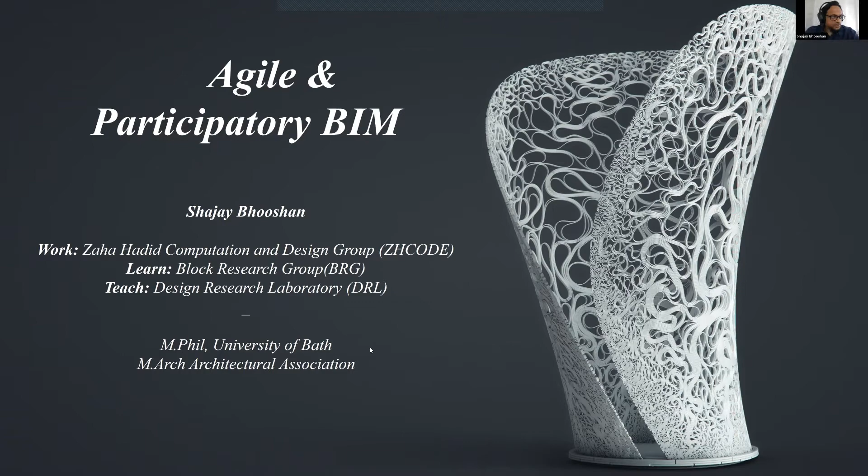So introducing a bit of myself, I currently work at Zaha Hadid Architects as the head of Zaha Hadid Computation and Design Group. I'm doing my PhD at the Block Research Group in ETH in Zurich. I also teach at the Design Research Lab, which is a master's degree program at the Architectural Association in London. And I've previously studied at the University of Bath and also at the Architectural Association, and prior to that in India.

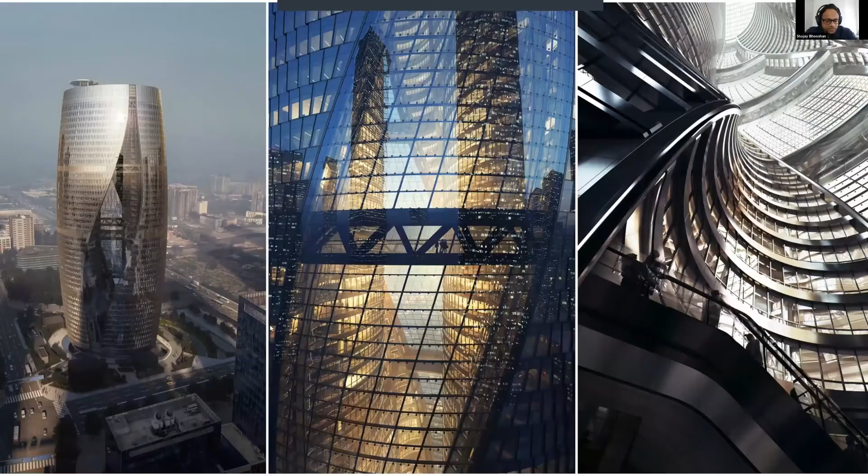So when it comes to complex geometry and complex buildings and the use of technology, Zaha Hadid Architects are kind of known for these kind of buildings, particularly this one that was completed last year, along with this one, which was also completed at the same time, towards the end of 2019. And so we have a track record and also high levels of comfort with the kind of BIM that is needed to design and deliver these kind of projects, because we've been doing that with increasing frequency since Zaha's passing 4 years ago. And also things have been in development for at least 20 years prior to that.

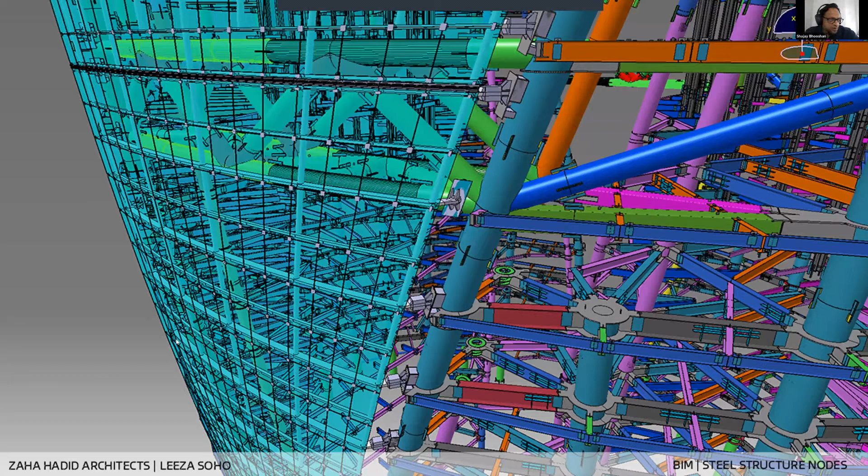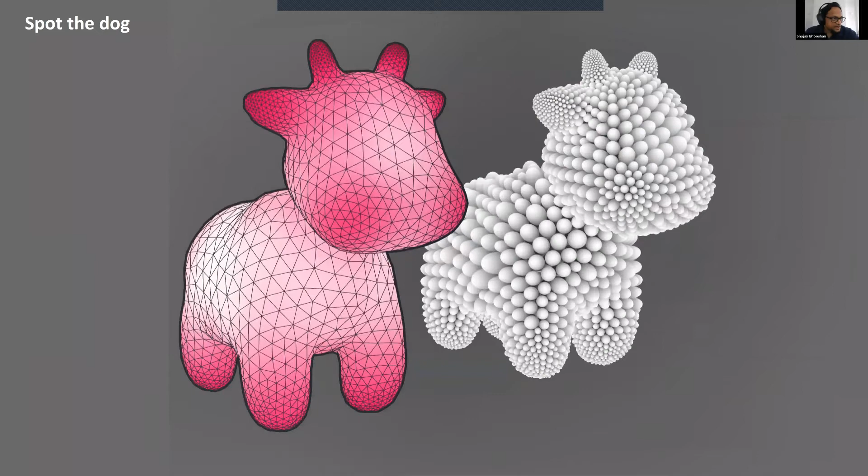So we are very comfortable with these kinds of workflows and tool chains and delivering complex geometry in a time and budget efficient way. But building on that, today I would like to talk about how we are adding in the layers of research and making BIM fun and also relevant to contemporary technological advances in other fields, particularly computer graphics and cloud computing and so on.

So that's one ingredient that we want to add to our capacities, and at the same time we want to leverage these increased capacities to start addressing other pertinent issues of the built environment, things like housing, sustainability, and so on. So in a technical sense, adding the research component, frameworks like COMPAS from the Block Research Group in ETH, which is a research-based framework, onto the BIM frameworks developed by companies like Buro Happold and Autodesk and so on.

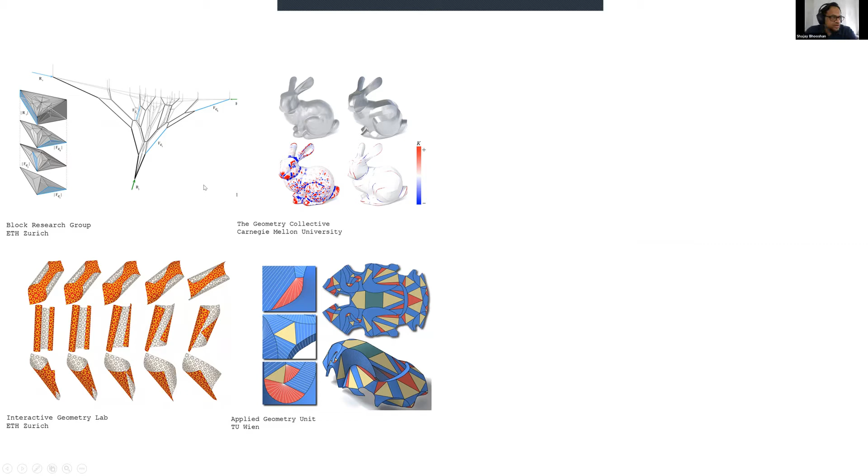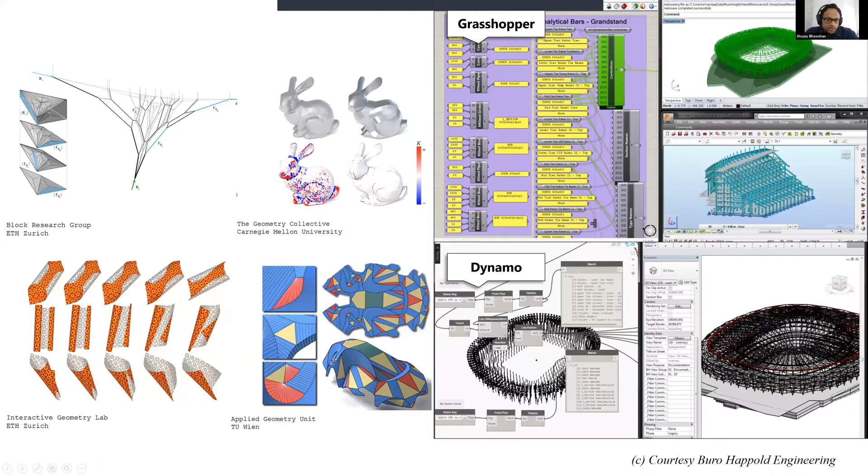Visually, this is what it means: looking at emerging research in efficient structural design, processing of geometry, interesting topics of origami and how that might affect manufacturing and so on. Combine that with everyday, business as usual BIM, which most of you would be aware of. And again, this is not anything particularly new. Even in the pre-computer era in the 19th century, architects like Gaudi were able to focus on the expressive aspects of spatial design, like here on the left, building upon lots of knowledge of other people and established protocols of design using geometric methods like these on the right.

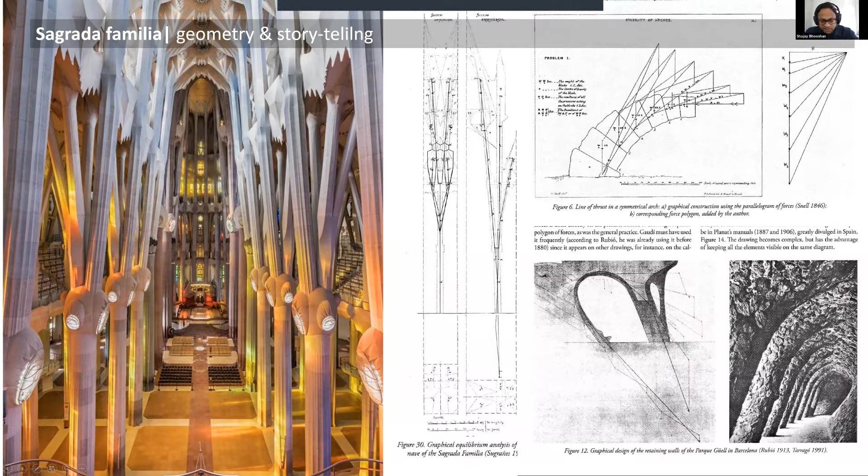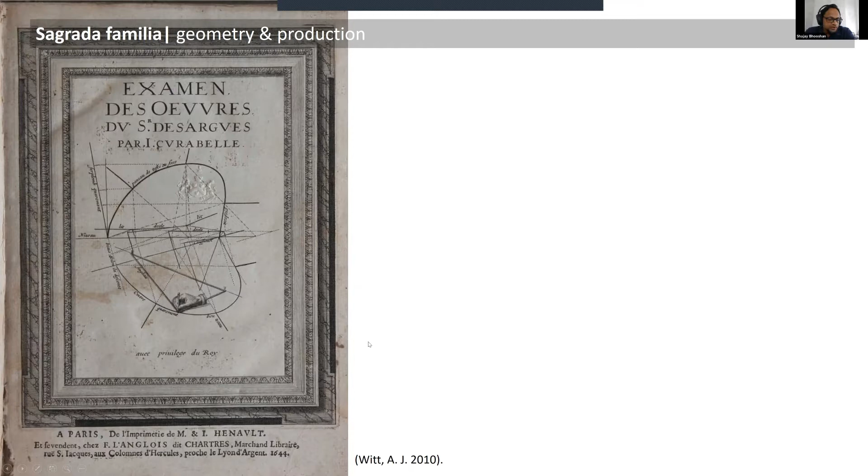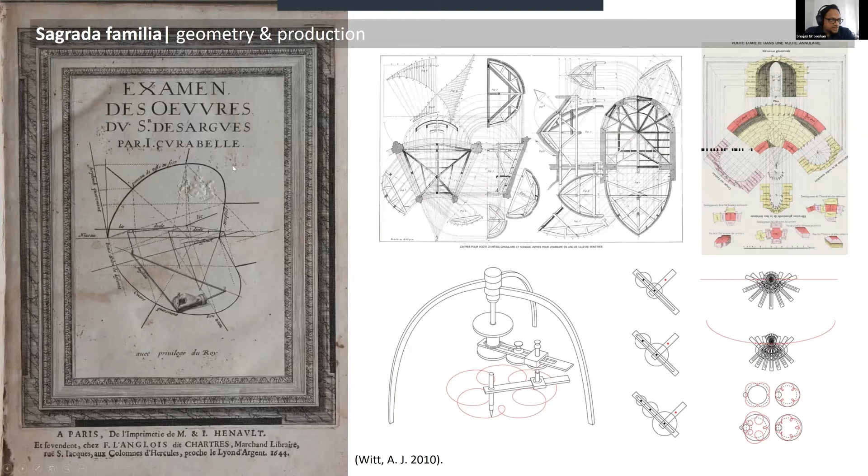And further, even construction economies were already building on such knowledge, which was encoded into manuals, into documents, and also into ways of drawing construction drawings and instruments to draw the geometries without knowing the mathematics behind it. So there was an entire ecosystem of such built up geometry based knowledge, which is what we are engaging with. And this is also very true in other fields which are making rapid progress, like computer graphics and digital movie making, where there are several PhDs worth of technical research operating in the background of the actual storytelling, the lighting design, and so on.

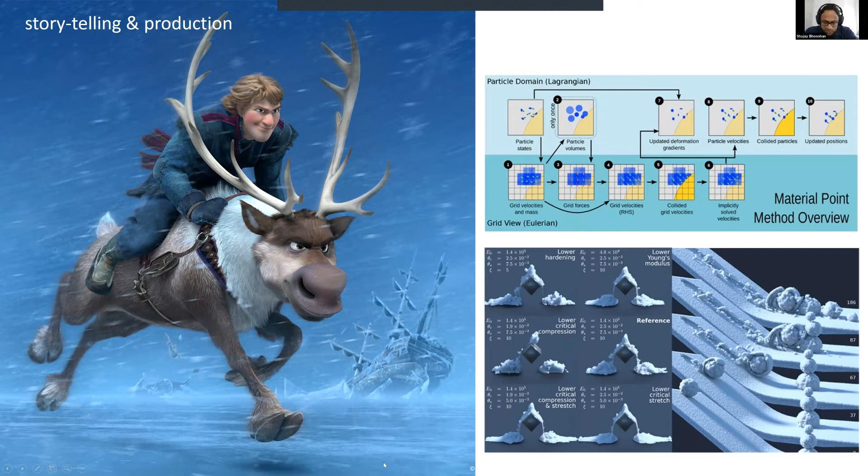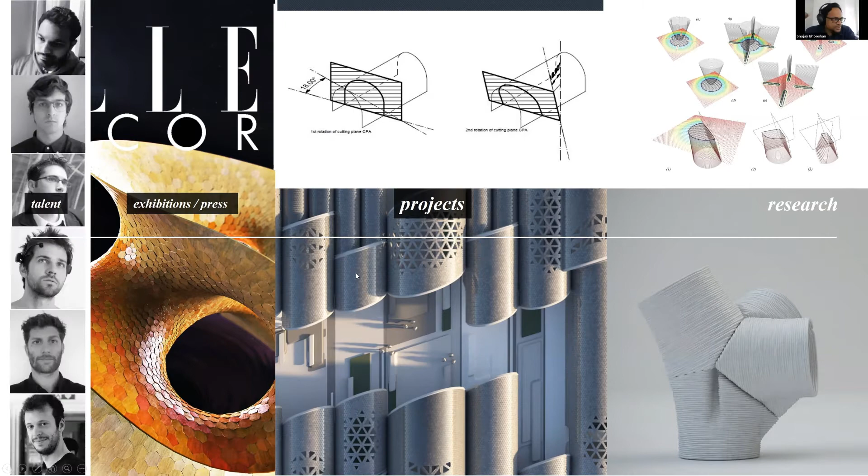So two main ingredients to this, that we are borrowing from history and also from other disciplines, is first of all how do you construct an agile team. My team is about 11 people, and Zaha Hadid Architects is about 450 people. So the 11 of us do a range of things, including project independent research and project-based applications of that research. We also do a lot of exhibition and press related work, and also talent development and acquisition and network development. So just focusing a little bit on how to build talent and networks.

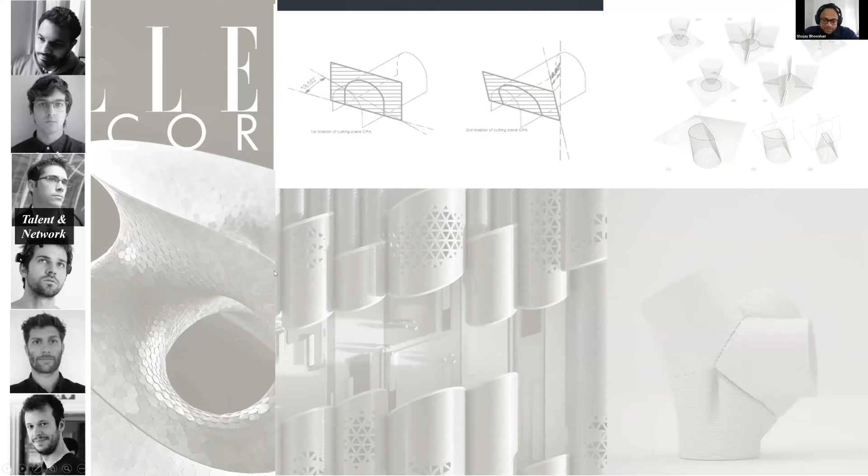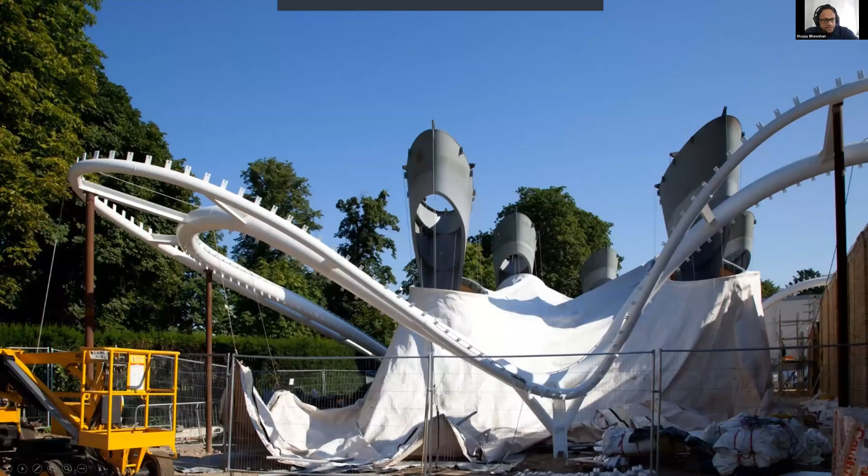And so when we, alongside like in London, where there was like real buildings being made in a similar way, where you bend pipe and you stretch fabric. In this case, it just happens to have insulation, and it also happens to be double layered and so on. It's better engineered, better made, but the principles are the same.

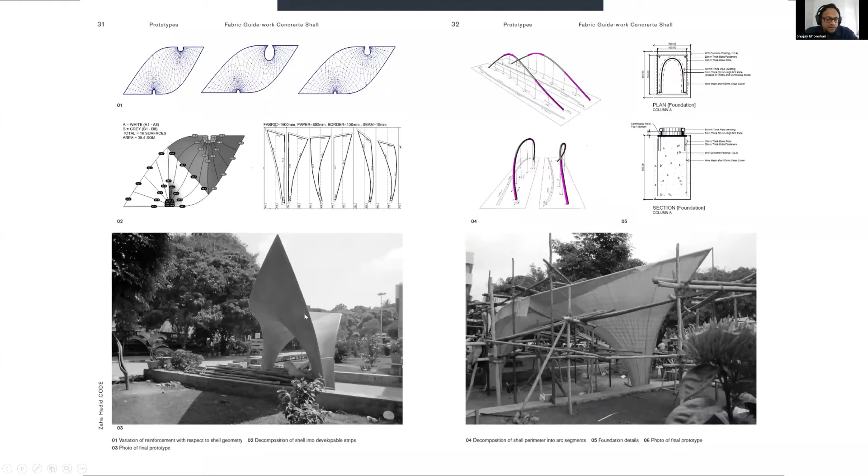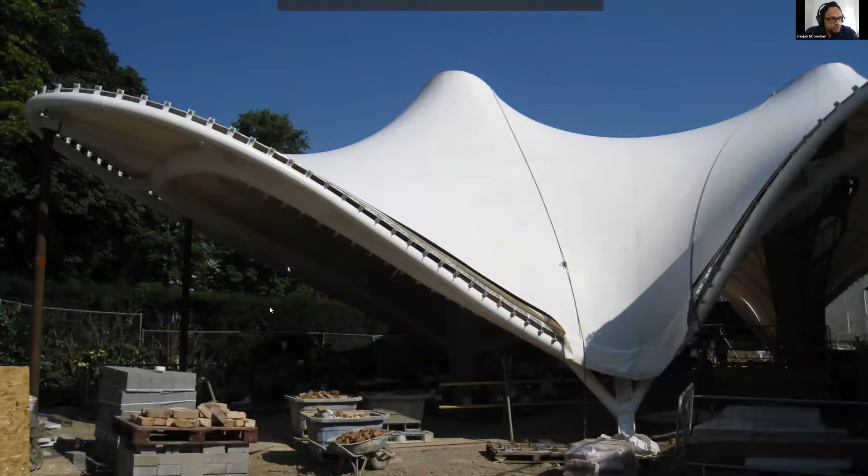So that's why we focus a lot on these kind of hackathon type efforts, because literally that's the backbone on which we build a lot of our tool chains, a lot of our downstream project applied kind of workflows. And another benefit of this kind of hackathon that we do almost every year is some of our colleagues and peers from the team have now left and started their own companies in entirely different fields.

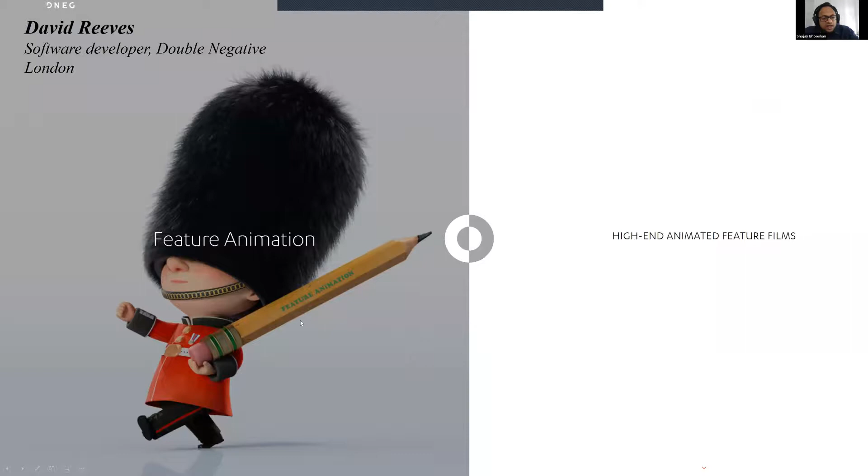Like two of our colleagues are now making robots. And another colleague of ours is now working in the animation industry in a company called Double Negative. And a lot of our collaborators are equally agile and inventive and resourceful. Like, for example, Jelle and Asbjorn, who started a company 10 years ago by just sourcing secondhand robots from Detroit. And now they're a publicly traded company.

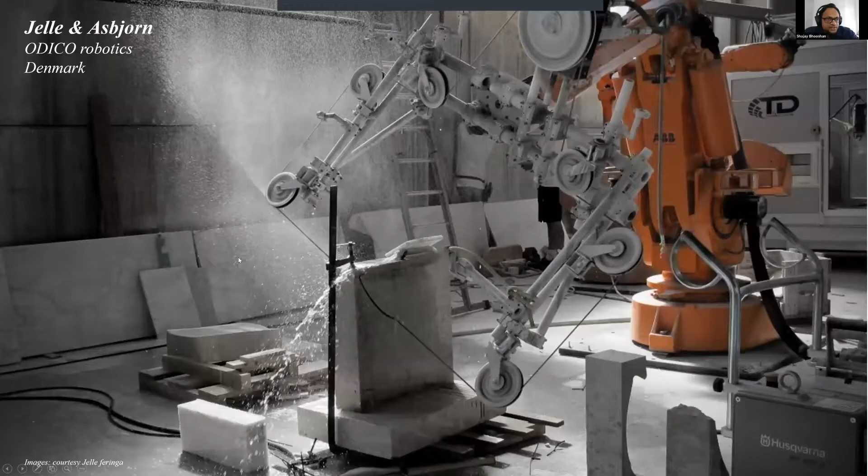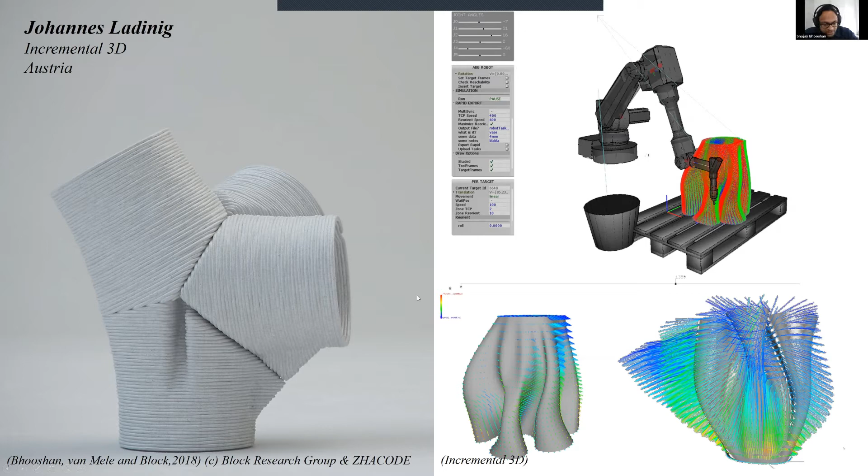And also it allows us to convince others like Johannes, who's started a concrete 3D printing company in Austria, that you can do these startup businesses relatively simply, and that a lot of the architectural knowledge and software making knowledge can be applied to make real use cases. So you don't need to make heavy investments to start these kind of businesses, which are entirely super digital businesses.

All of this is based on an agile framework, and particularly a geometry-based framework, because it's easier to communicate geometrically, visually, than numerically. So that's why we built a lot of our tools around simple geometric algorithms and visual reasoning. So as research topics in terms of manufacturing, we've always been interested in thin shells and textiles for the last decade and a half.

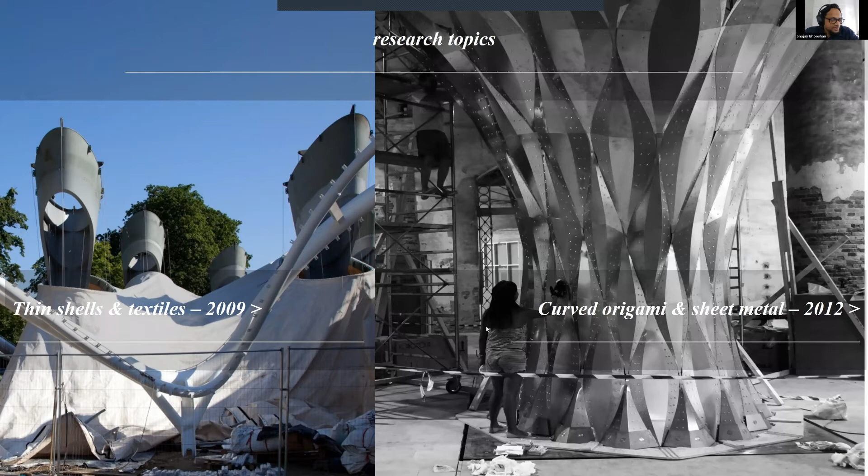We've also been interested in origami and sheet metal manufacturing and sheet material manufacturing, particularly curved origami. And we've also been interested in all kinds of 3D printing at all scales, like high resolution polymer based 3D printing, large format plastic 3D printing, and also concrete 3D printing, on which I'm doing my PhD at the Block Research Group.

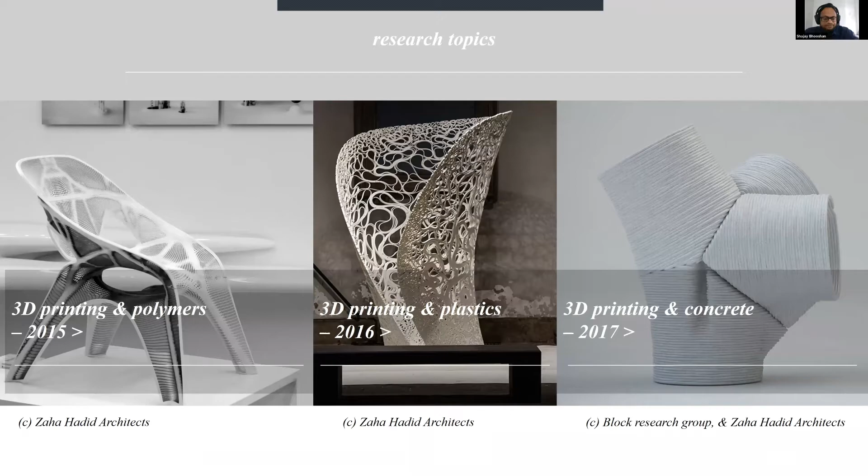So all of this is enabled by the so-called architectural geometry. Simply put, architectural geometry is just geometry that is aware of its structural performance, and it's also aware of how it will be manufactured downstream. So while you're designing, you're already aware of what are the critical manufacturing constraints. In other words, it can be considered as a kind of vertically integrated design and all the tool chains.

So from design to production, you're already thinking ahead, so you're not arbitrarily designing some shapes, or designing to a fixed catalog of parts. So just to illustrate this workflow and these ideas, I will take the latest research prototype that we did with Block Research Group again in Mexico City, along with Architecture Extrapolated.

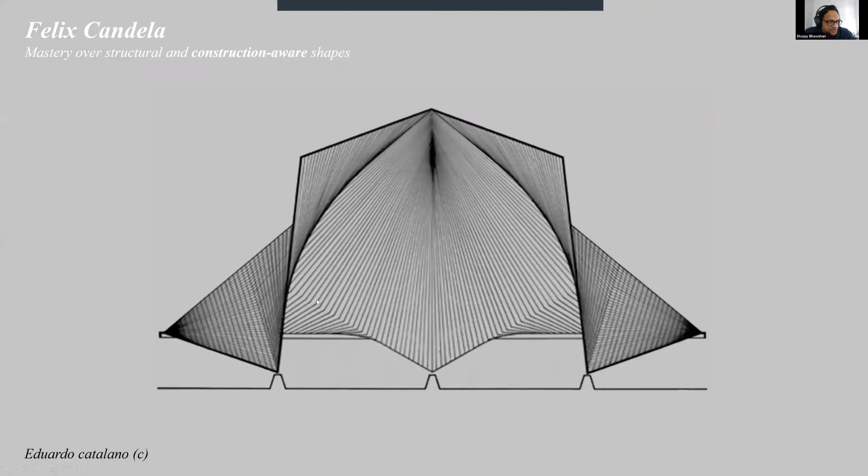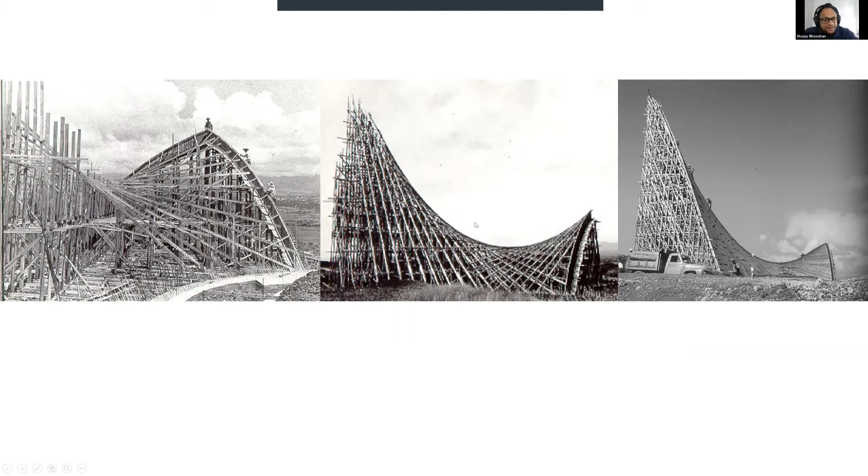He based his entire career on such hyperbolic paraboloid geometries, because they were both structurally efficient, therefore materially efficient, but they also could be made relatively simply using straight formwork, ruled formwork. But at the same time, because it was based on formwork, which was thrown away, they were elegant shapes, it was beauty at a price.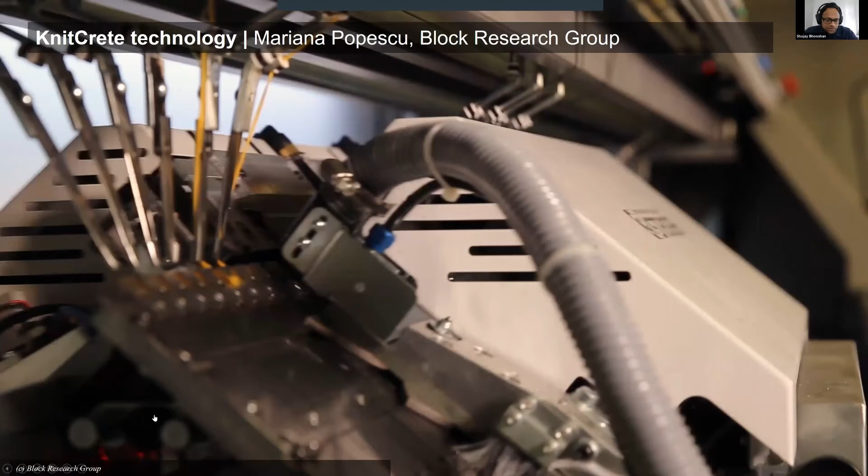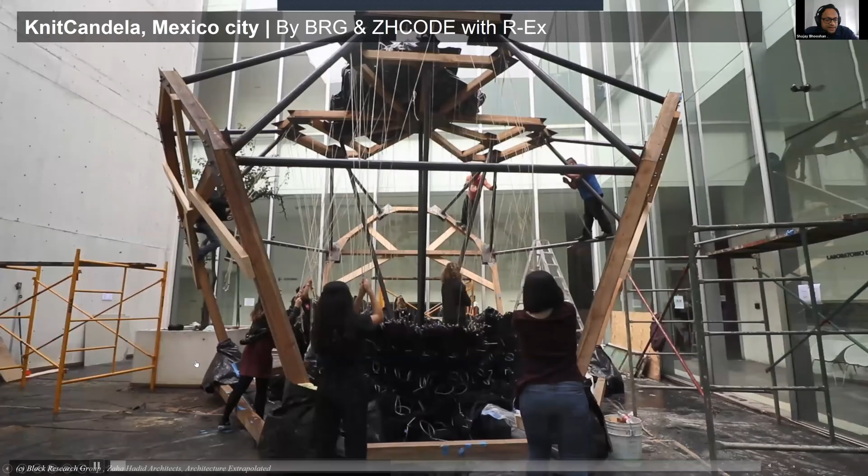And so it was relatively, and this was like untested technology before we made this. It was like my colleague at the Block Research Group, her PhD research in knitting, using a simple knitting machine to knit all the formwork and put it into a suitcase and send it to Mexico. And at the same time, Architecture Extrapolated had a lot of experience working with the craftspersons of Mexico City.

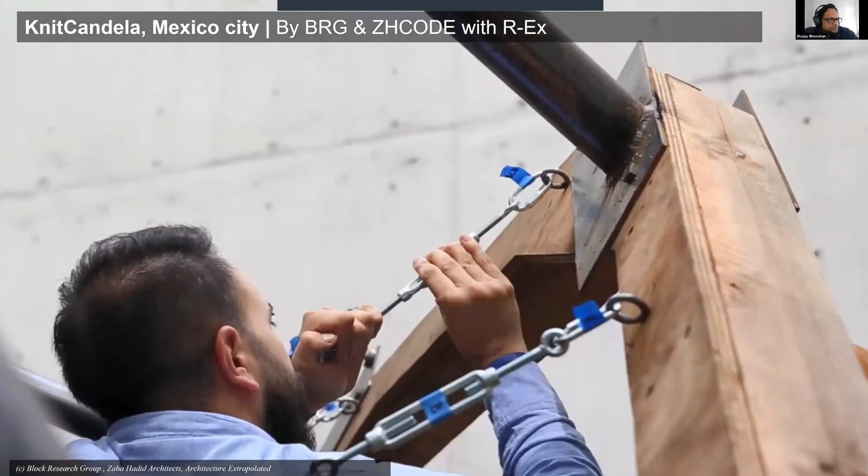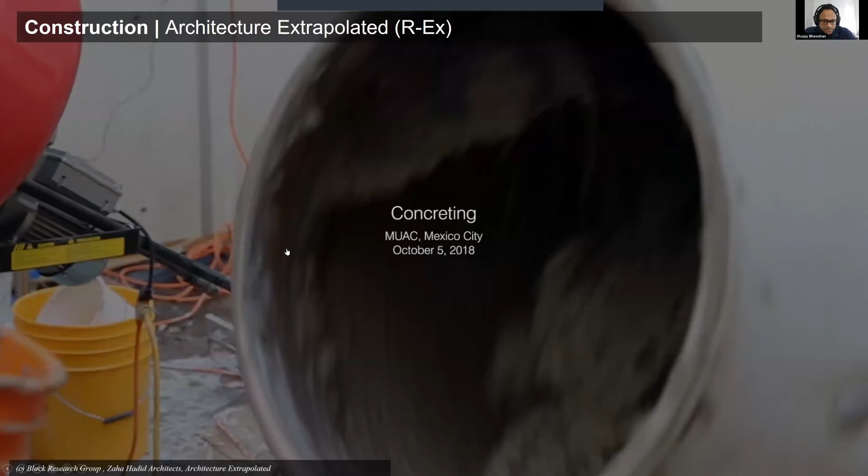It's not easy to cast concrete, particularly upside down. And so there was a lot of skilled labor, and also the concrete recipe and so on. So it's a good mix of digital technologies with traditional craftspersons, and also considering shipping logistics and so on. And also here's how things were concreted, and also the formwork is very little, just the edge beams, and the rest is stretched fabric, and it's lost formwork.

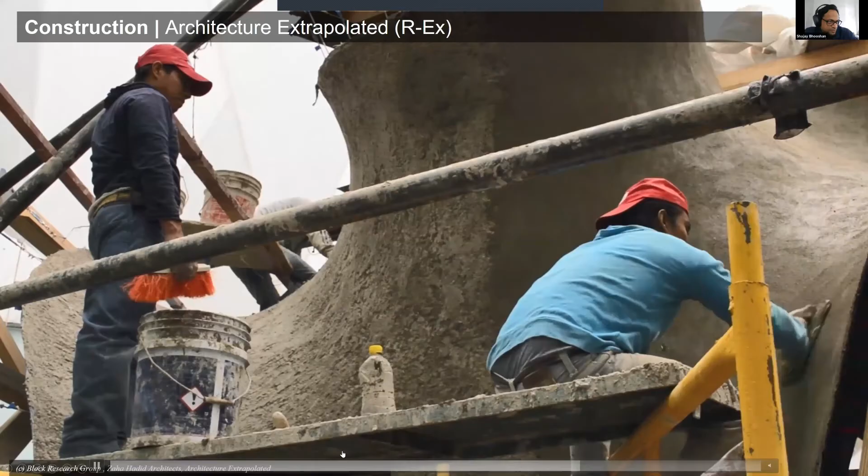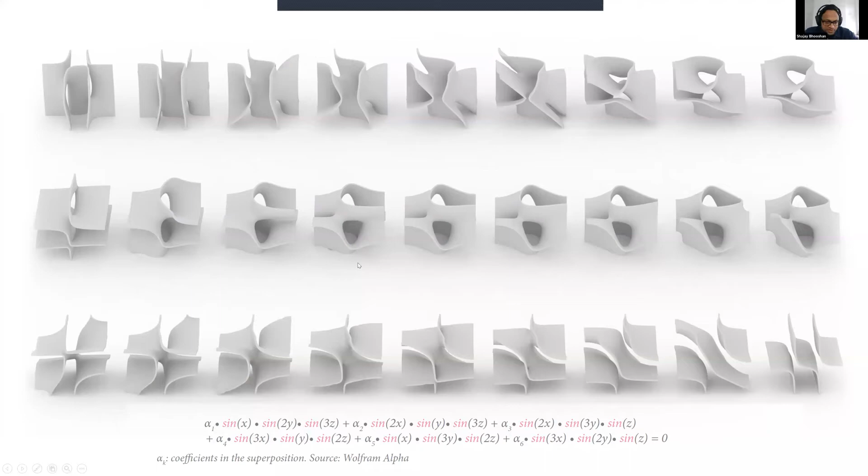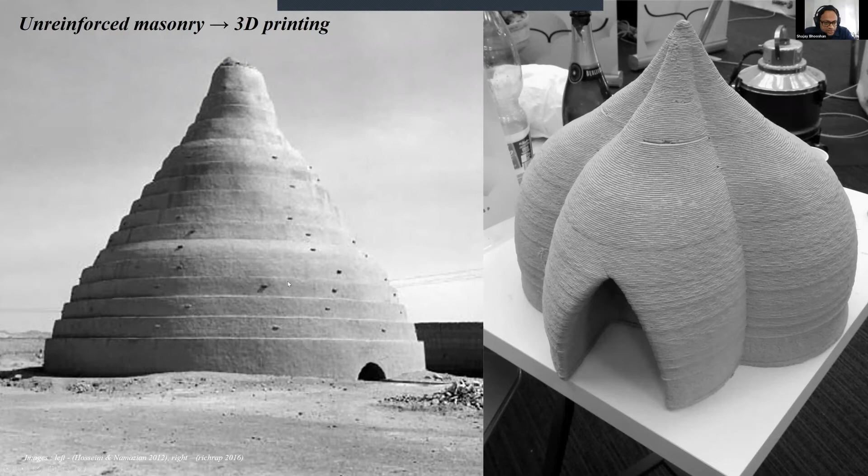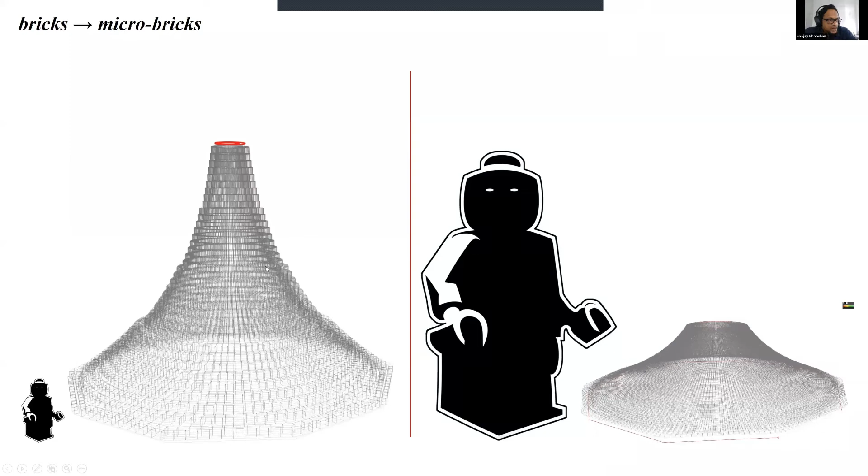And so we're now trying to do a similar kind of thinking with 3D printing. How can we think of 3D printing in a geometric way? And also think of 3D printing on the right as a kind of scaled down version of masonry. Every culture knows how to make masonry, and there are very simple geometric rules to understand masonry structures. And if you scale that down and make some modifications, you can begin to understand this 3D printing, particularly in concrete.

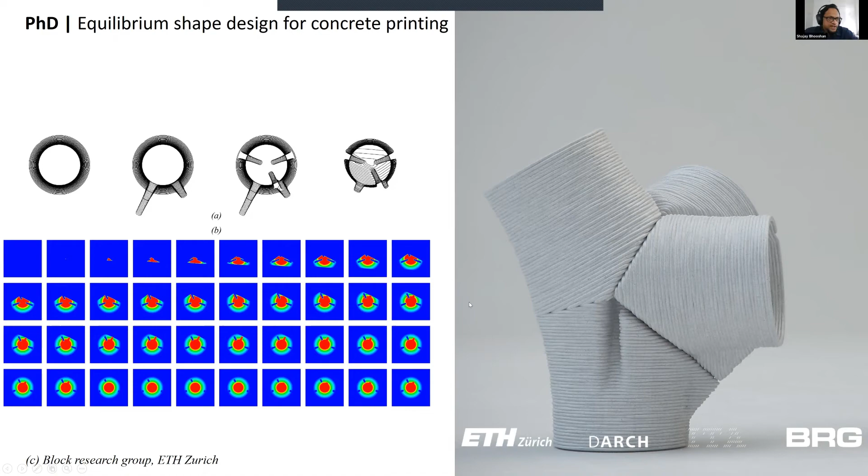And because it's a layered construction, we are also from the ground up rethinking how to represent the geometry. Can we use image-based technologies rather than other standard BIM representations, particularly NURBS or meshes? So how can we represent all of these layers by using a bunch of images like an MRI scanner, as opposed to representing all of this detail in other heavy formats? And therefore it's directly related to the fabrication process, because the machine that prints it needs to know the information of every layer. So again it's structurally related to masonry, construction-wise it's related to masonry, and so on.

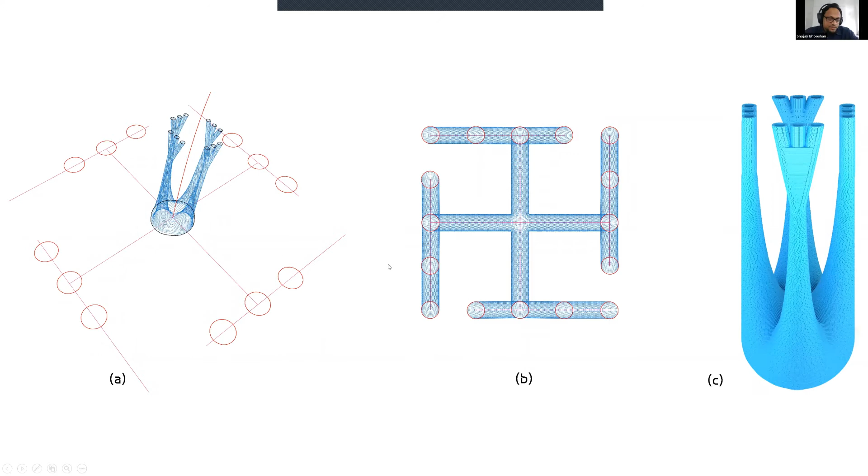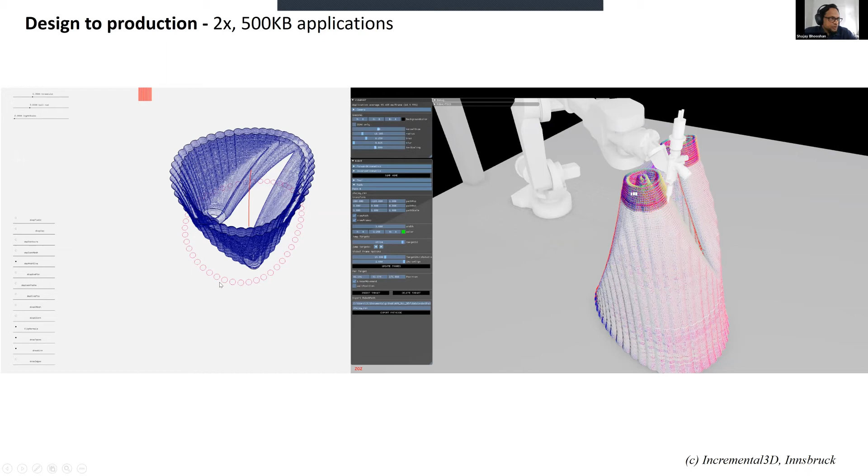Another advantage of rethinking everything in this case is that it's very easy to create complex geometry. For example, this object on the right is created with simple inputs. All you have to do as a designer is provide these circles and these red lines, and the blue is the outcome, automatically created by these simple inputs. The additional benefit is you can go from the design software to manufacturing, and both of them are 500 kilobytes each. You can create this object in 2 minutes, check it in another 10 minutes, and then start printing. So that's another benefit of rethinking the entire workflow, being lean from the software point of view.

Another benefit of geometric thinking about structure is that it can incorporate a lot of historic knowledge built into these cathedrals and other civic buildings, which was entirely geometrically captured. There were no numerical calculations. So all of the sustainable aspects of this kind of stone construction are because of the geometric nature of these ribs and how material is arranged geometrically. And my PhD advisor, Philippe Block, and his research group are incorporating all of these ideas from cathedrals, adding new layers of computation, saving a lot of material and also a lot of space. So it's 70% lighter, 25% thinner floor slab.

So these are the key aspects of architectural geometry, a geometry-based way of thinking about structure and construction. It's scientific, it's exciting, it's novel, it's fun. It's very entrepreneurship friendly. It's historically continuous, unlike modernism and other aspects of the 20th century, which got rid of a lot of historic knowledge. This one is actually picking up on all the things that were developed over hundreds of years. And it is increasingly proving to be ecologically sustainable because you're using a whole lot less material in the first place. Even if you use concrete, you're using so little of it because the structural strength comes from the geometry.

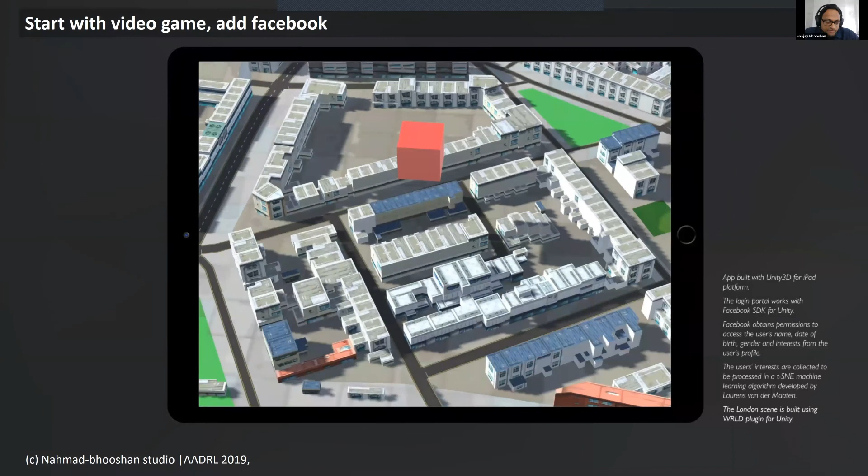So one of the projects, again with our students at the Architectural Association, what we are now thinking is how we can leverage video game technology, how we can leverage Facebook to do good things, how we can build communities, online communities first, where people can think about housing and leverage all of these new digital manufacturing technologies, but focus on what they want. So these are just blue sky sketches, where we are making these little apps and allowing people to participate and choose their house or things like this.

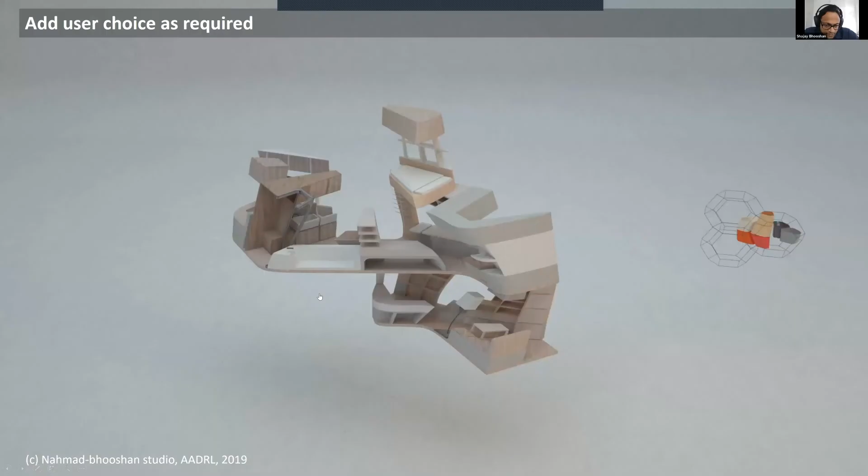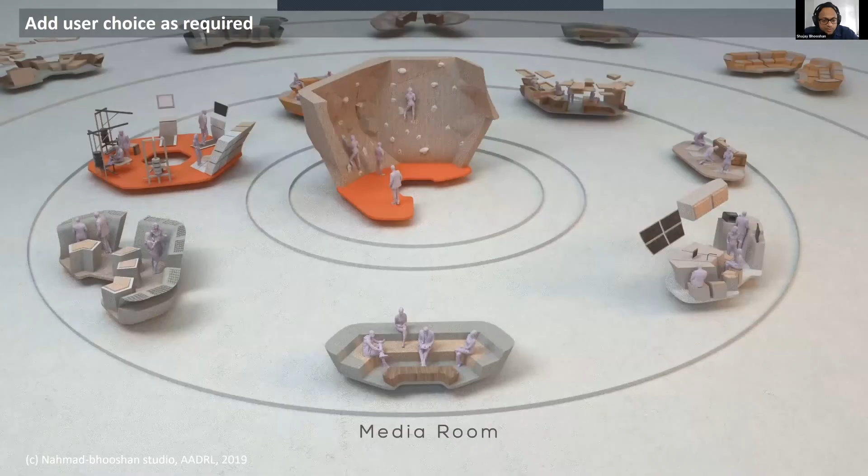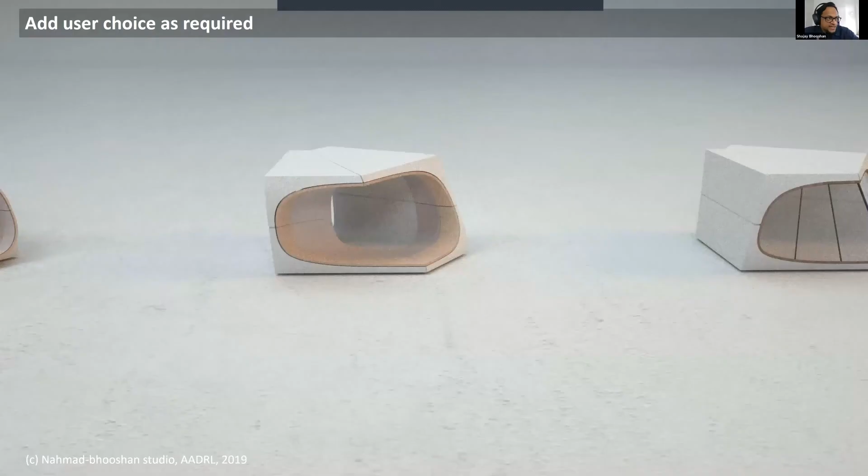So ultimately, what we want is to be able to offer all these customization choices, not only in the shapes, but also in the kind of spaces that they want, communal spaces, private spaces, sharing spaces, and so on. So to build on top of the promise of industrialized construction all these user choices, so that the construction side is taken care of, and we already know the technology is there and it's available. So we're just combining available technologies with participatory technologies like the game engine, like Facebook, like the phone, and so on.

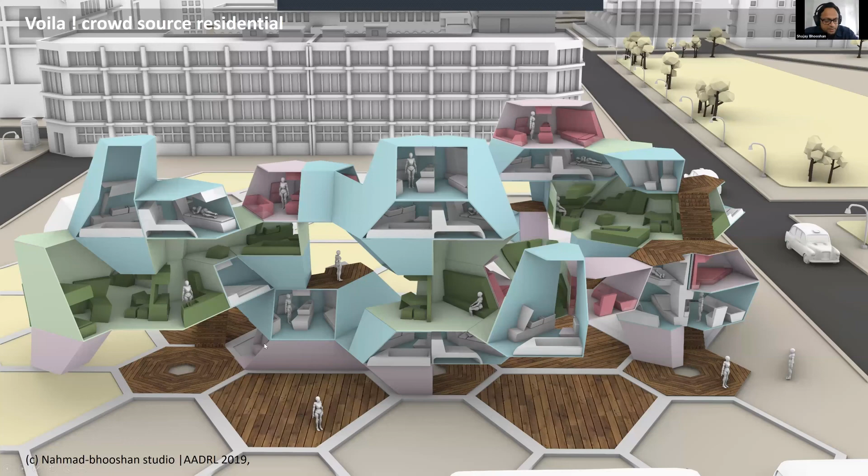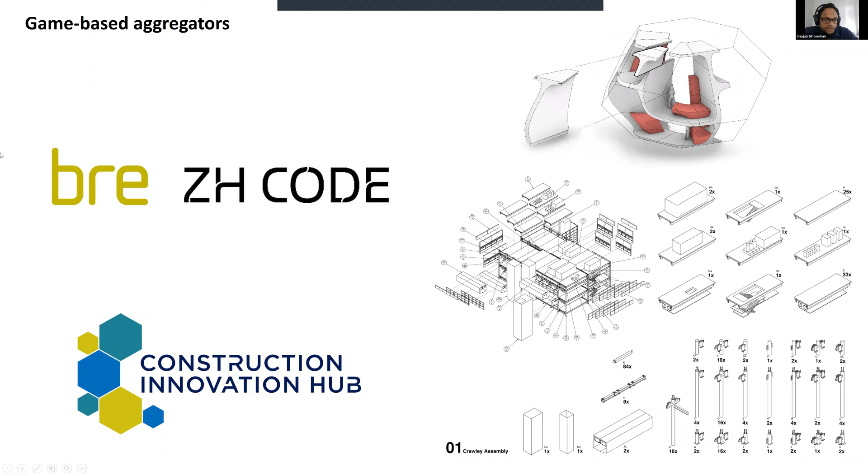And so we are beginning to see the first applications of this kind of blue sky thinking from academia. We are thinking of video games as aggregating these components, which is not particularly a new idea, but we are also saying that we can aggregate within that other things like curved geometries, which are known to be structurally effective, materially effective, but so far were cost prohibitive because there was no manufacturing technology. So that's increasingly changing. So we want to incorporate that already into video games.

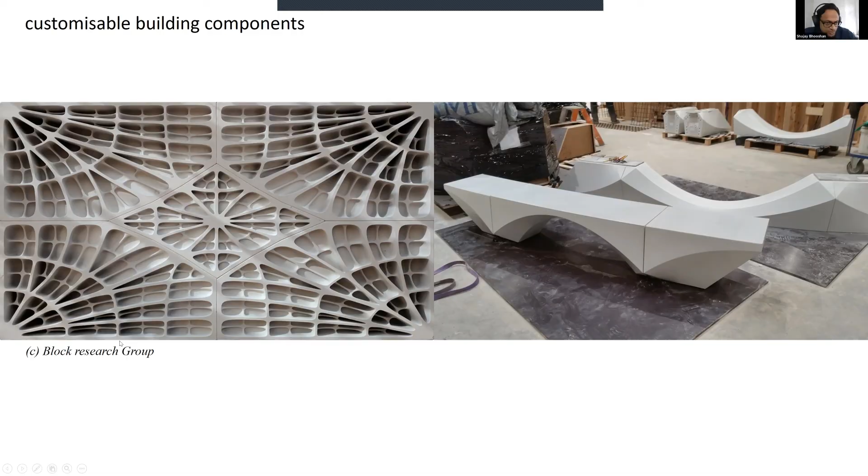In other words, all of these research ideas, like the floor slab, like the concrete benches that we're now making for only exclusive clients, we can begin to make all of these things available through democratic software toolchains. So this is our first commercial project where we are literally trying to do that.

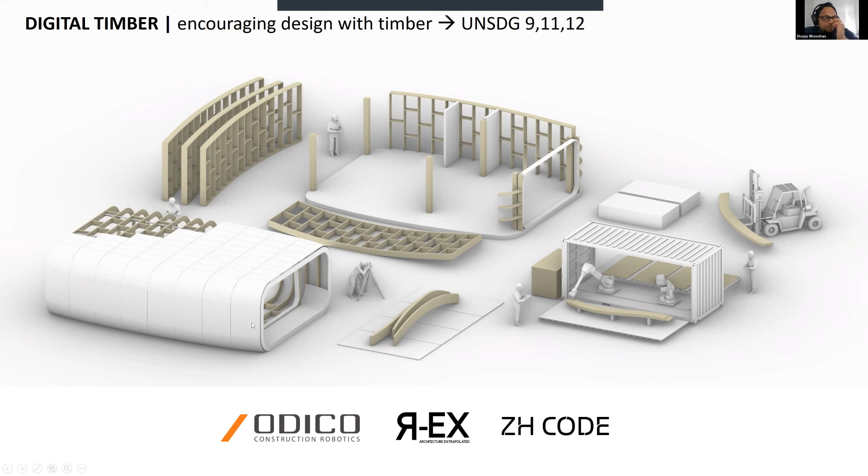This is a project in Honduras, which will go live by the end of the month, where we're actively exploring how we can import machines rather than import prefabricated boxes, and layer on top of that user choice, where the users can choose all kinds of things about the arrangement of their house, and so they can pick these pixels, and all of these are already computed, not only the shapes but also the costs, and so on. So they can pick between 1 to 5 pixels, and they can pick any of these options.

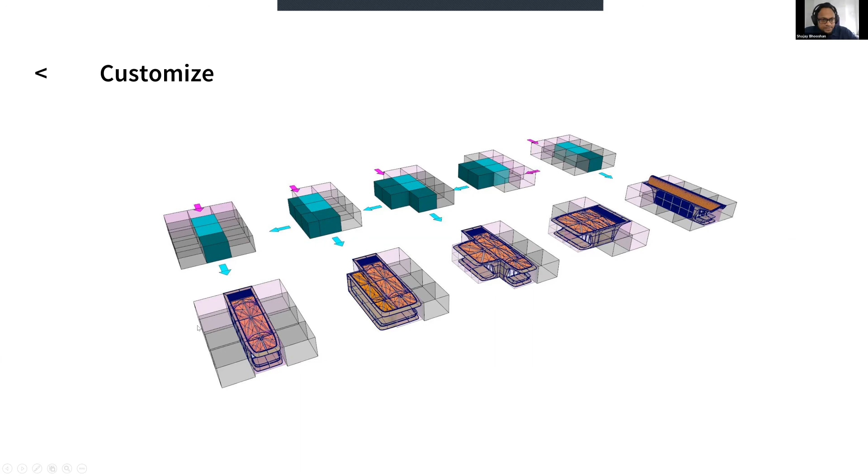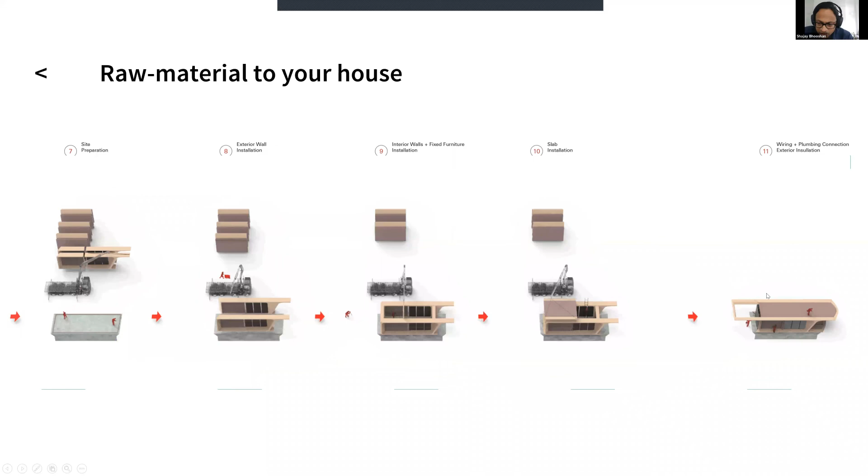And these are only the tip of the iceberg. There are hundreds of combinations that you can think of. And then combining that with standardized construction systems with some bespoke construction. So we're thinking how to convert raw material all the way to the house. So in the end, the user is only concerned about their house. They don't have to worry about all the logistics and so on. And so that's our outlook, and that's really what keeps us super enthusiastic and hopeful of the near future.

And another thing that keeps us extremely positive is that all of this has actually been done before. And it used to be called the Bauhaus. In the 10 or 15 years that they were operational, they had this 100-year impact. They explored exactly all of these technologies of knitting, of origami, and so on. And all of these got manifested in showcase buildings of the 1920s. And at the same time, it also affected all the housing efforts in the 70s and so on. So we're trying to reconnect with modernism and also prehistory, like people like Gaudi and so on.